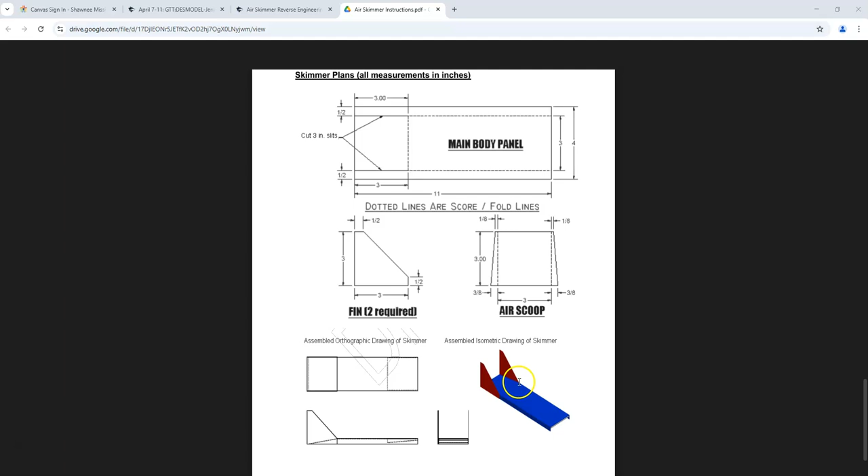With this project you've got this main body panel, which is kind of in blue. You've got the fins, which are in red. They attach to the outside. The back part of the main body panel is angled down to create a rear air scoop. And then there's a front air scoop that fits in between underneath the front side of the main body panel.

So to start out, we're going to make the main body panel, and let's look at some of the dimensions here, because we want to try to create this so that we have the fewest extrusions possible, the simplest way possible.

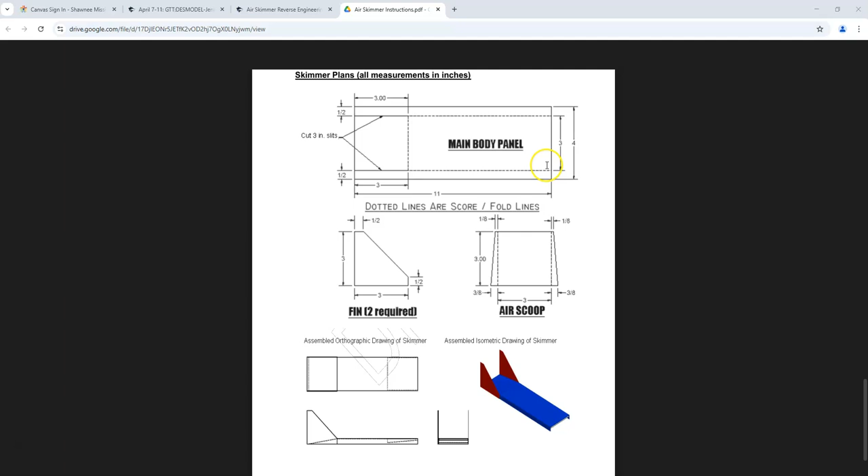The overall width is 4 inches, and the fold for the side edges is at 3 inches, so that means the little edges right here are a half-inch tall, and our rear scoop begins 3 inches forward.

So we're going to draw this from the front view, actually as a rectangle. In Inventor, I'm going to start a new part file - went up here to new part and selected that. Now I'm going to start a new sketch, and I'm just going to make it on the XY plane.

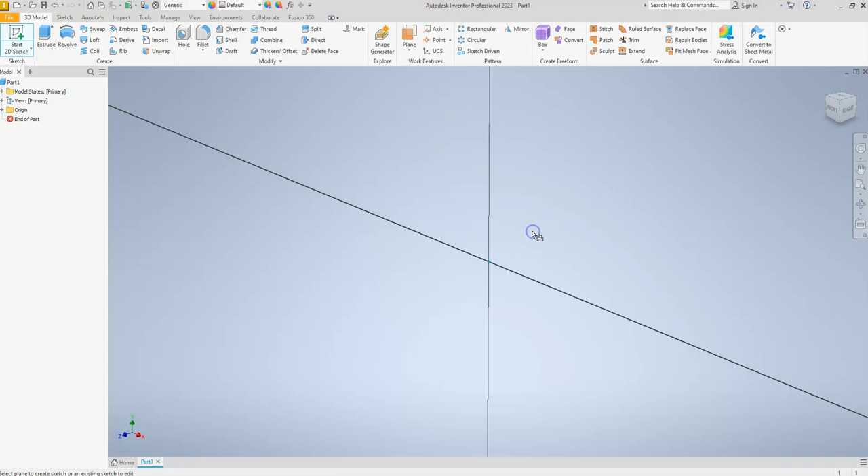I'm going to draw a rectangle that is 3 inches by a half-inch tall. So it's going to be 3, you type that in and then hit tab, then 0.5 for a half inch. Let's focus that on the front view.

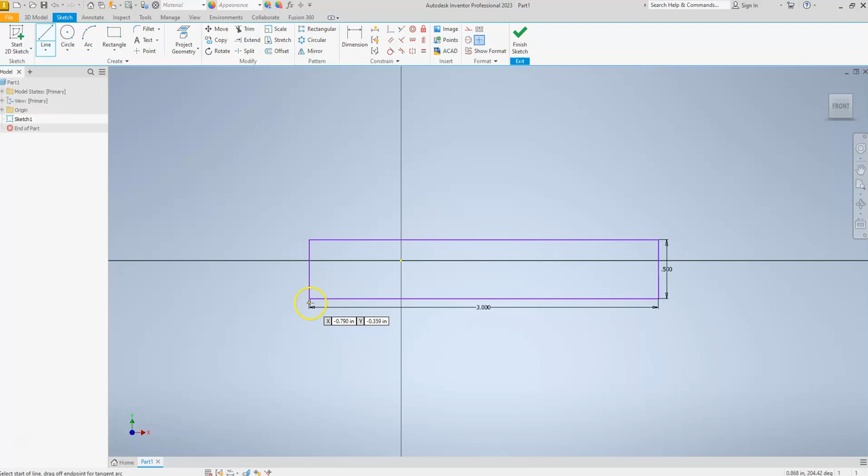And then I'm going to draw this area with a line. Straight up, straight over - make sure you get the little parallel sign there so that it's not angled, but perfectly even with the top edge - and then straight down.

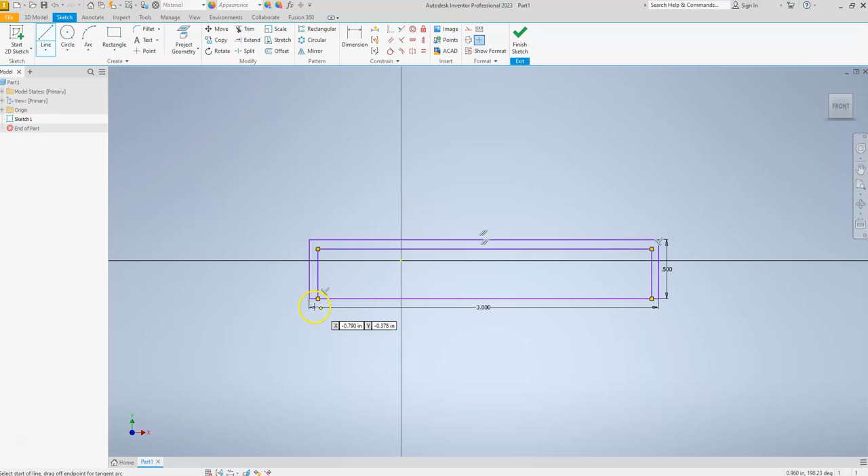And this is going to be really small, like the thickness of our cardstock that we use to make these. So I'm actually going to dimension from this side to that side. That is going to be 0.05 inches - very thin, like the thickness of the cardstock.

This side is also 0.05, and then this part is 0.05 as well.

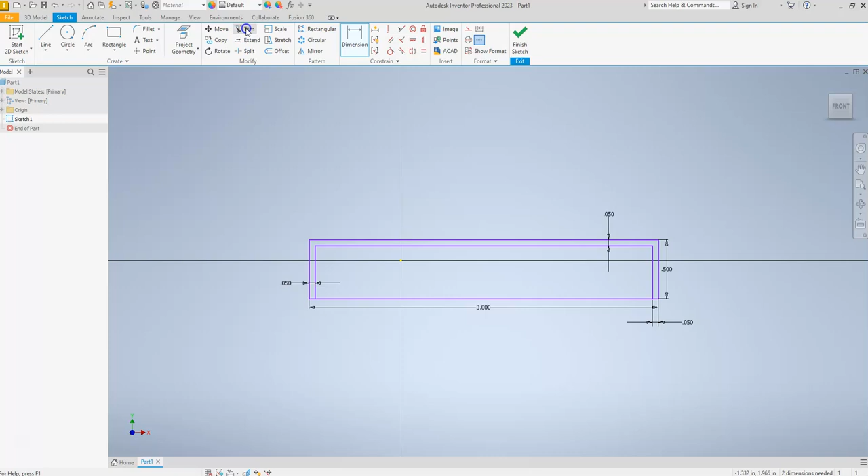Now I'm going to take the dimension off temporarily - we'll see if I need to. I'm going to trim this right there, and I'm actually okay there.

So while I'm on this, something to point out - if I dimension from this side to that side, it should be 2.9 inches, right? Because we just subtracted 0.1 from 3 inches, so we've got 2.9. I don't need that number, I'm just showing you where I'm going to get some of the next dimensions for this.

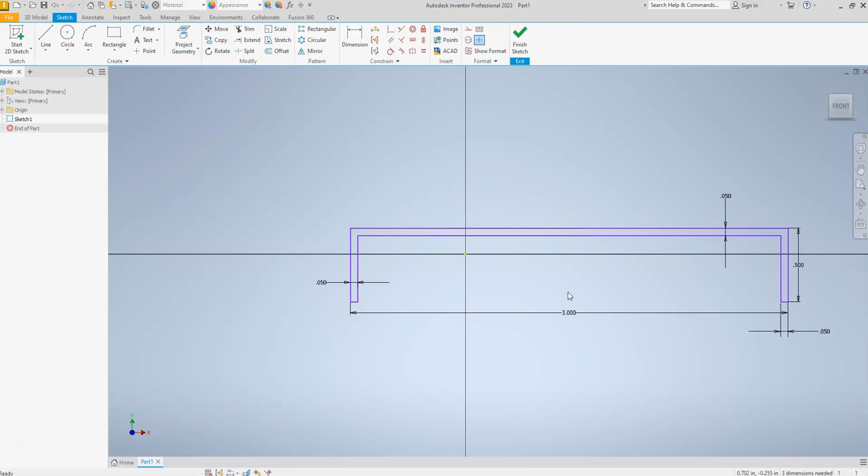Alright, I'm going to finish this sketch and extrude this. And if you remembered, our length for this project was 11 inches, so I'm going to extrude that at 11 inches.

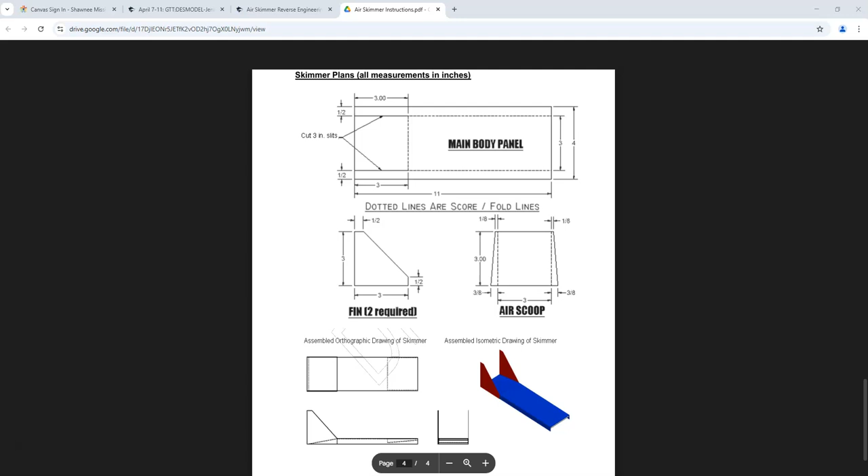Focus this, and you can kind of see now we've got the beginning of our main body panel. And if I go back to my plan, you can see the blue main body panel here - that's the shape we're working for. Now we need to get this angled part at the back, and I'm going to show you one way to do that.

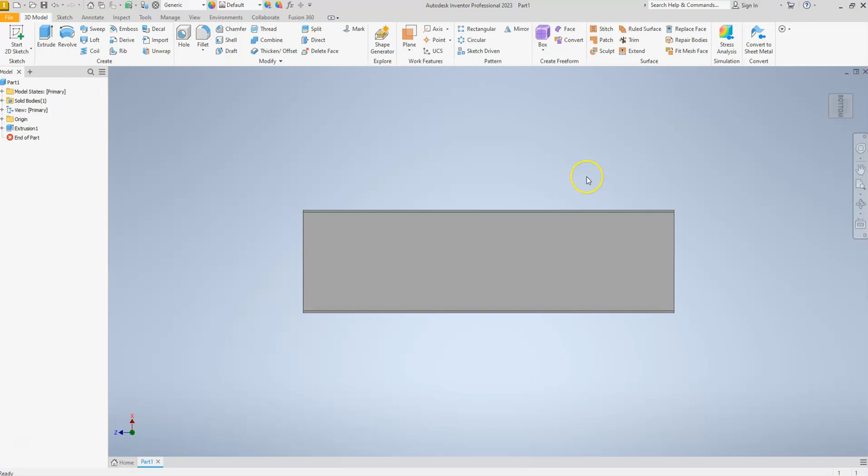I'm going to turn this over so I can see the bottom edge and click on it. I'm going to start a 2D sketch on the bottom. This is the interior part - notice the green lines are inside, not including these little edges. It's this part, so my sketch is there.

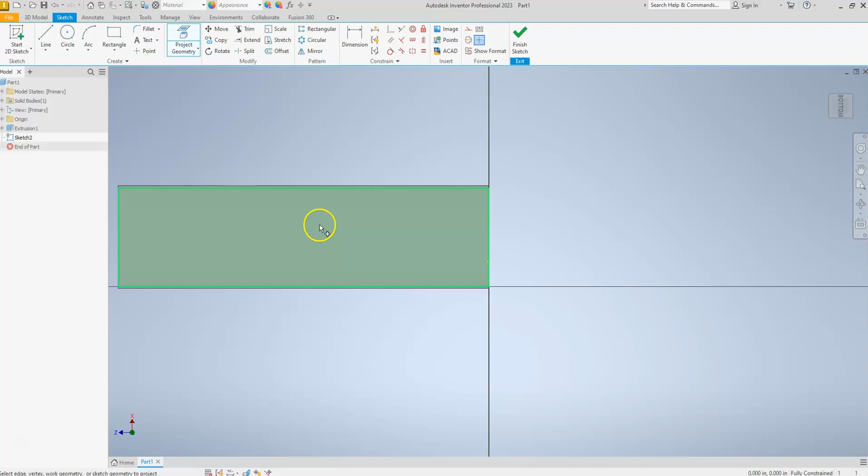I'm going to project the geometry from the inside, like this interior rectangle. Now that includes these lines in the sketch, so that's going to be helpful.

Now I'm just going to take the line command and draw a line connecting from this side of the interior rectangle to this side. I'm going to zoom in. I want that, I don't want this outside part - I want it just like that.

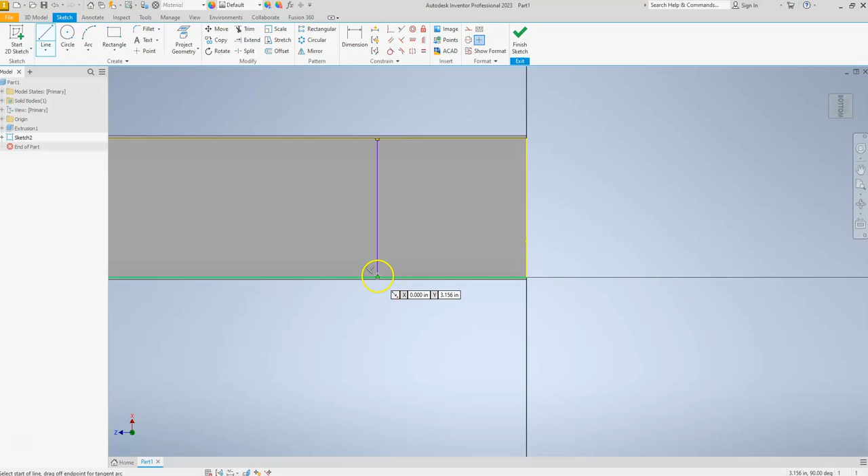Now I'm going to dimension from my new line to the back edge of the air skimmer. That needs to be 3 inches. I'm going to finish the sketch.

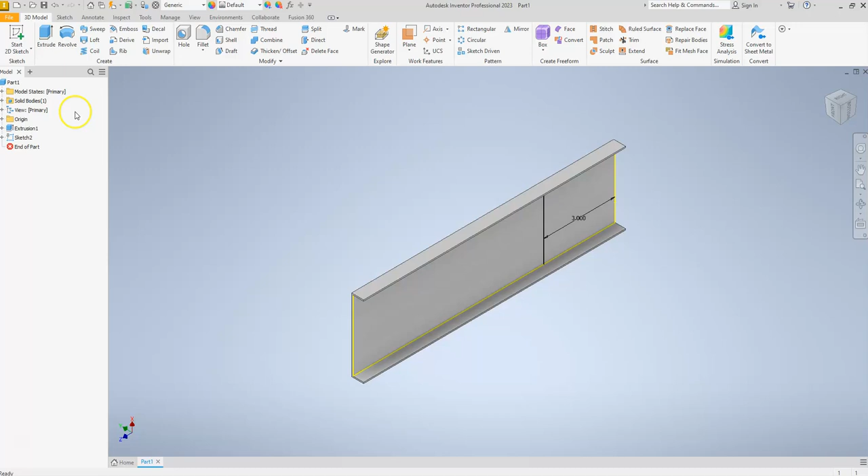Now I'm going to angle the view cube so you can see this. I'm going to extrude this part, but I'm going to cut it, going that way and go through all, so it's just going to cut that off.

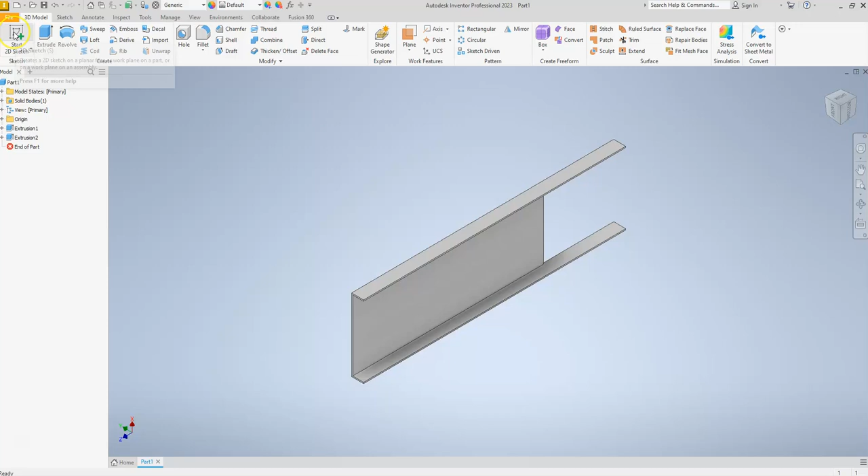Alright, so now I've removed the part of the main body panel that the rear air scoop needs to fit into. And so now I'm going to start another sketch on this surface.

Now if I zoom in, notice it's including that little bit - that's where I'm going to start the sketch. Now I need to angle the view cube so I can actually see the area that I'm going to sketch on, which is this area.

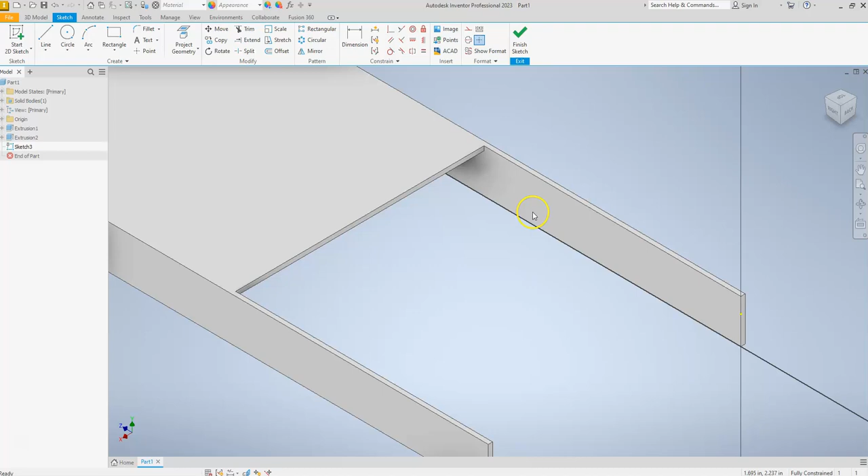And I'm going to project the geometry from that shape, so I get this little line right here, which is going to be really helpful.

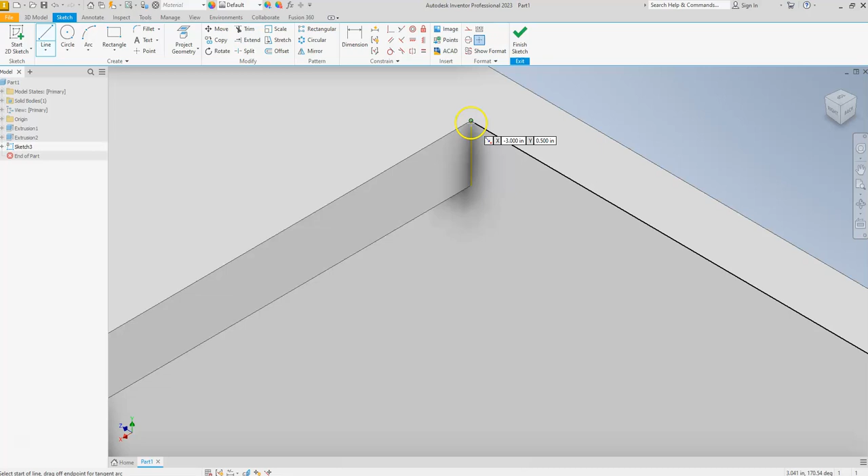And then I'm simply going to click on the line command. I'm going to draw from the top edge, right there - make sure you get the right thing. I'm going to zoom out, using the mouse wheel to zoom in and out, and I'm going to move it approximately right there.

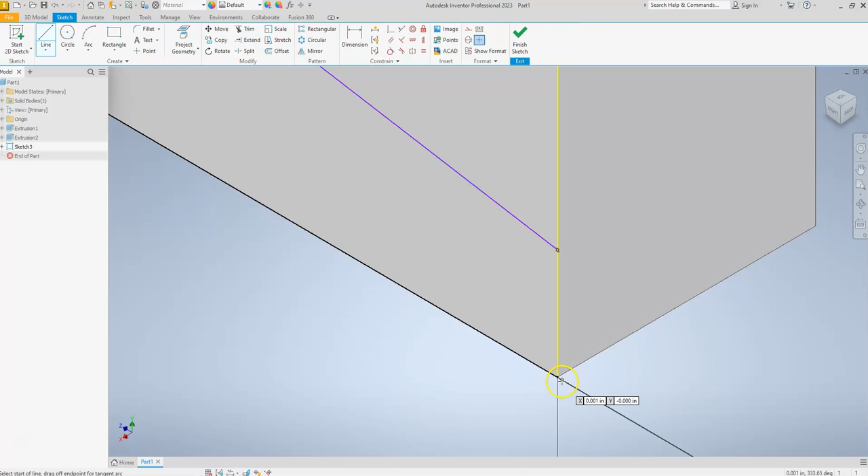And then I'm going to draw another line from the very bottom corner, right here, drag it over and connect it right there.

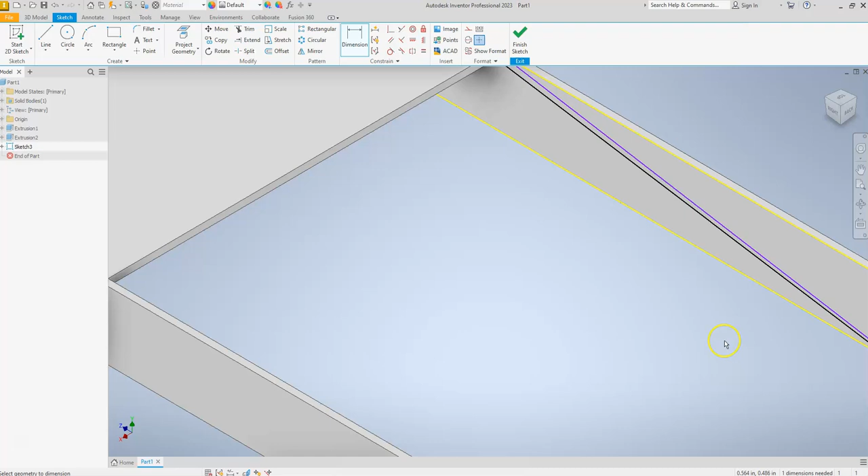Alright, now here's the important part. I need to dimension - hit escape to end the line command. I'm going to dimension this back edge, get it right where we can see it, from that end point to that end point needs to be 0.05.

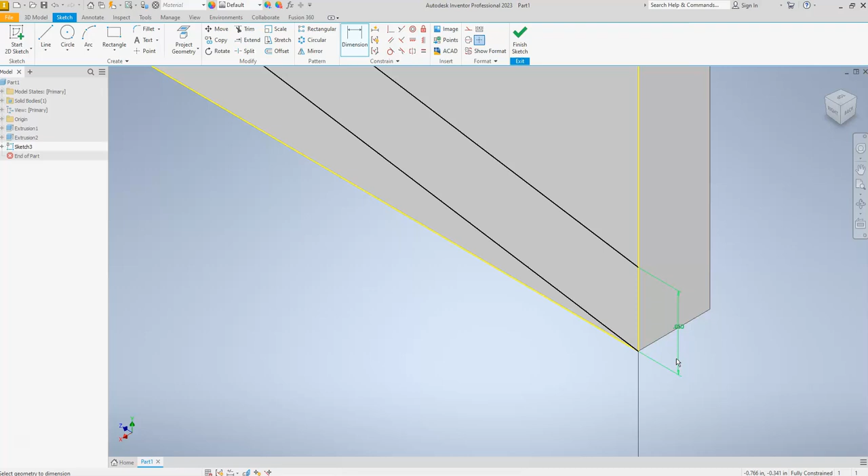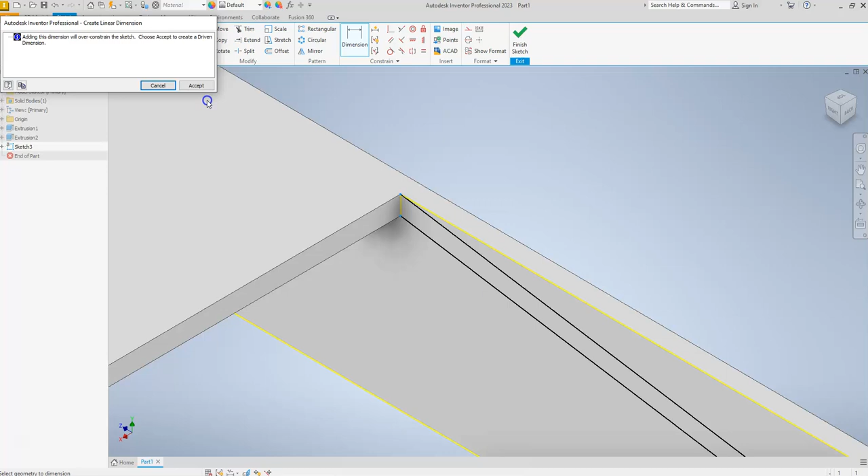Right there, you can see it better now. Okay, now I'm going to go up. If I dimension from that point to that point, it should be 0.05, and it already is, so I'm just going to cancel that - I don't want to put it on there twice. And then I can just finish this sketch.

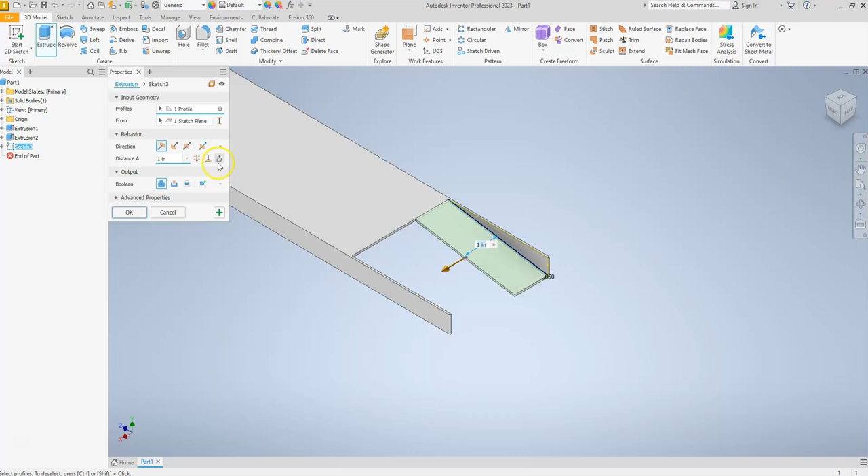And extrude that part. Now, how far do we want to extrude it? We want to go to the next part, so one of these options up here is to next - that one right there, you can see the mouse that I've got it on, to next right there, and then click OK.

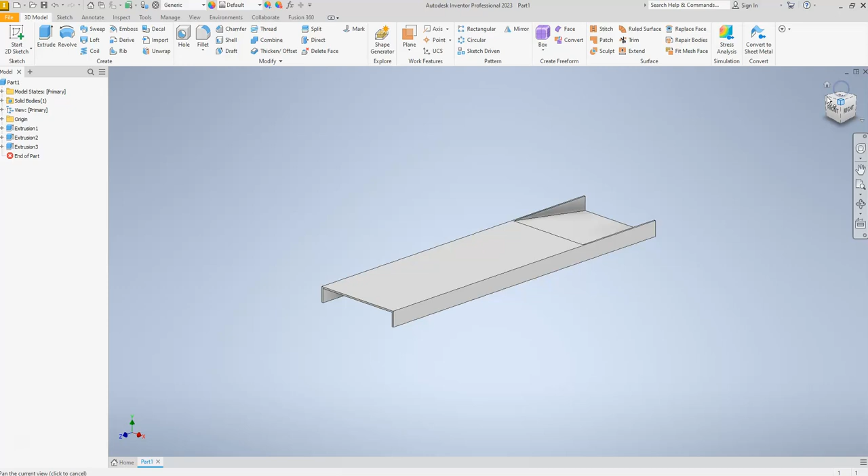Now I have my main body panel with the rear - I call it a scoop, but it actually traps the air in the back of the main body panel. Click on home, you can kind of see what we've got here. Click the different angles, you can see how that looks. And that's about it for the main body panel.

Remember the dimension between these little edges is 2.9 inches, because we're going to need that number when we make the front scoop, but I'll do that in a different video. So, okay, that's it for the main body panel.